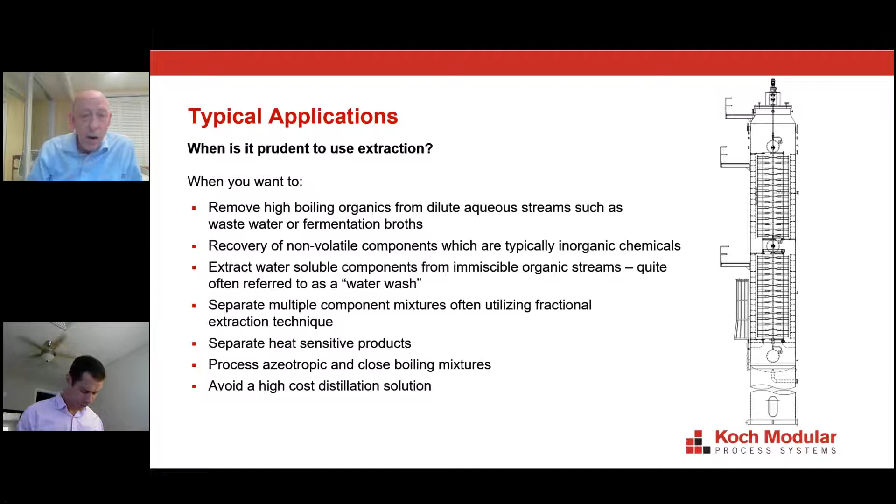The third case is when water is used as the solvent in an extraction process. Typically, if you have an organic stream with something to remove that is very miscible in water, a lot of people call this a water wash in their plants, but in actuality they are doing a liquid-liquid extraction process.

Here are some industries we get involved with. This is just a sample; we work with more than these, showing some very typical types of extraction processes you'd often see. Certainly, we do a lot of work in the CPI area.

We mentioned acetic acid, washing of acids and bases, and sometimes just recovery of very valuable materials. In metals and mining, there's a lot of different metals that can be extracted and recovered by a liquid-liquid extraction process. Many times in polymer processes, we get involved.

Caprolactam is certainly a well-known process where 3 extraction columns are typically used, and there's probably 20 or 25 plants around the world that use that technology. But sometimes we get involved with recovery of catalysts, which are very expensive and can't be disposed by liquid-liquid extraction. And then again, using water to extract material from these things.

In the last several years, we've done a lot of work in biochemical processing, for instance, where chemicals are being produced by fermentation broths or algae broths. And again, if these things are higher boilers, it's not economical to try to boil the broth away. Those could be recovered by liquid-liquid extraction more effectively.

Effluent treatment, certainly if you have a wastewater with high boilers or non-volatiles in it, liquid-liquid extraction is an excellent technology to consider for those types of applications.

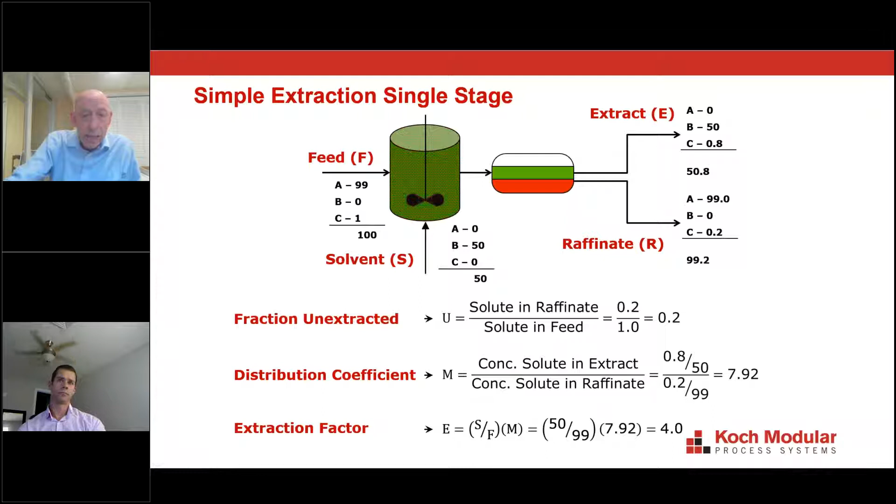So 80% extraction is obviously not good enough for most extraction processes. So if you're doing a batch process where you're mixing and decanting, which we call cross-flow extraction, after the first mix and decant, you then have to take your raffinate, add solvent to it, mix it up again, decant it again, and do that as many times as necessary to get from the feed concentration to the raffinate concentration that you're looking for.

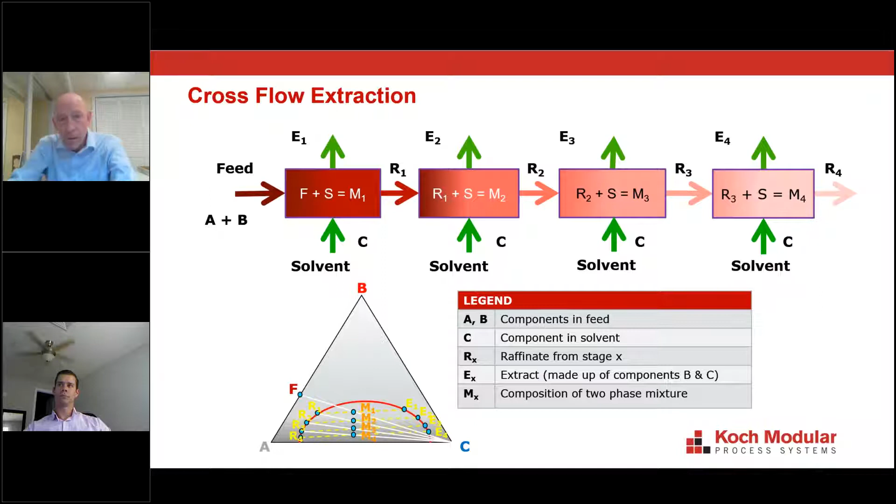Usually, though, a better process is to do this in a countercurrent fashion. This shows the same 4 stages as I had in the cross-flow example. However, the solvent now comes into the 4th stage, and then the extract from the 4th stage becomes the solvent in the 3rd stage, and so on in a true countercurrent fashion.

Now, if you run through the calculations with the same number of stages and the same solvent to feed ratio, you can get to pretty close to the same raffinate concentration using countercurrent versus the cross-flow method. But obviously now what you've done is you've significantly reduced the solvent usage.

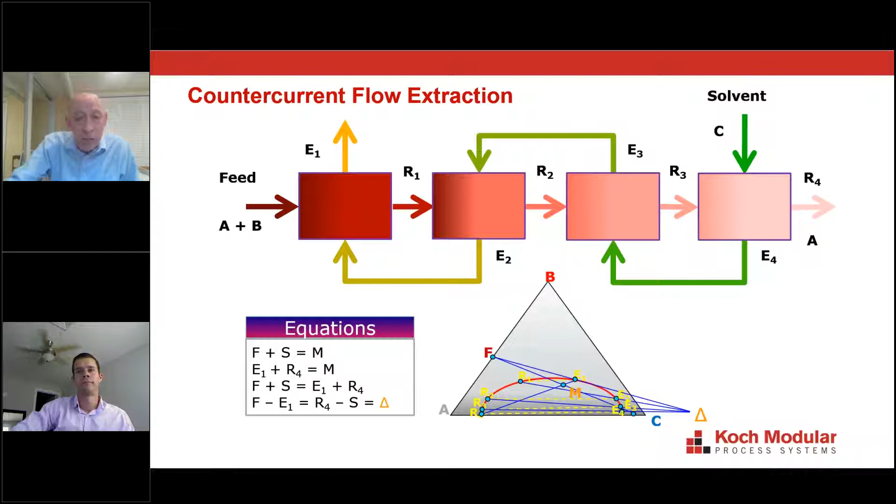In this particular example, you're only using 25% as much solvent. And usually that solvent needs to be recovered downstream, say by a distillation process, and that's where the bulk of your operating costs for an extraction process is going to come in.

It's going to come in that downstream distillation column and not in the extraction step. So certainly the idea of an extraction column then is to have your two phases flow countercurrently and then to create theoretical stages in this column to create a more effective extraction.

In this example, we're showing the feed coming in the top, and it's the heavy phase, and it fills the column, so it's what we call the continuous phase. The solvent's coming in the bottom, being broken up into droplets, which flow up through the continuous phase to the interface. So that's the dispersed phase in the process.

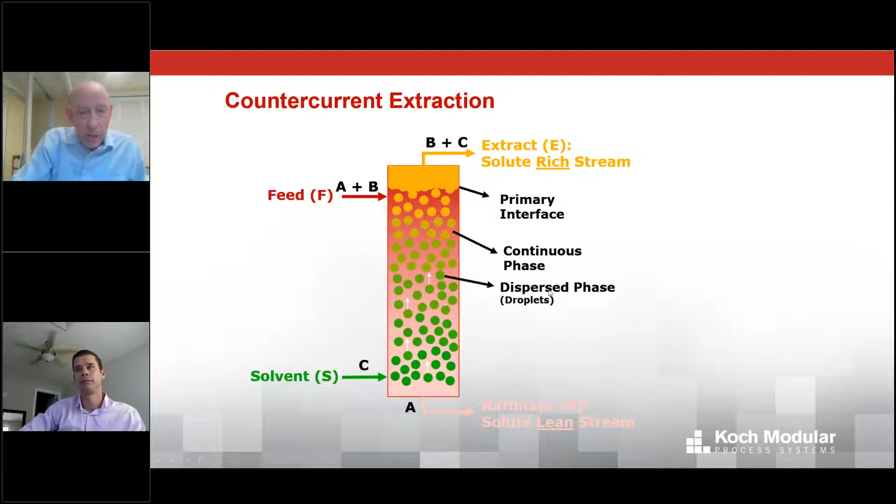And then the extract comes out the top and the raffinate comes out the bottom. So which phase should be continuous and which phase should be dispersed in an extraction column is a very good question. Brendan is going to be covering that later in this presentation.

You would then take the raffinate that you separated, put it back in, put fresh solvent in again at the solvent to feed ratio, mix it up again, separate it again. And we like to do this 4 to 6 times to get from the feed concentration to the eventual raffinate concentration that you're looking for, because the distribution coefficient can change with the concentration of the solute.

From our standpoint, it's just as important as the raw data that you have a qualitative observation of how these two phases interact. And specifically, when you turn the agitator off, how quickly do they separate? What happens at the interface? Do you get solids building up, which we call a rag layer?

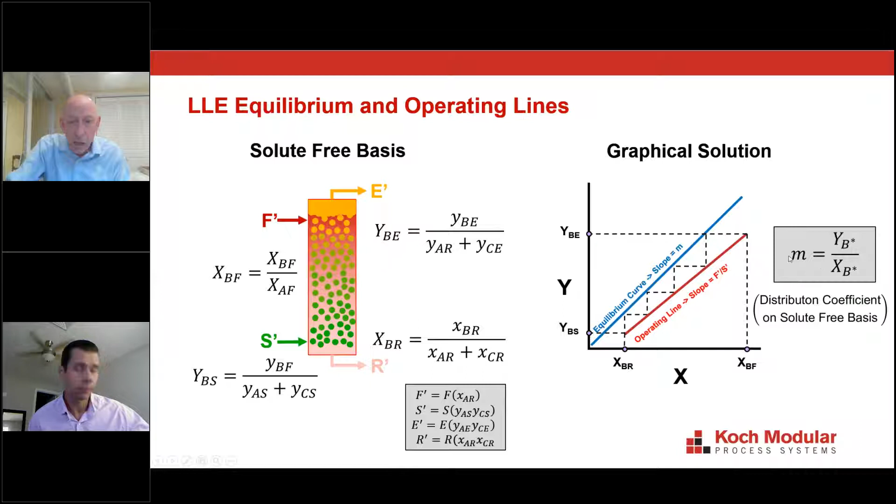So on this operating line, the upper point here is where the feed comes in and the extract goes out. The lower point down here is where the solvent comes in and the raffinate goes out. So like I said, you draw your line and step off the stages.

And this is a simple example we had where we were extracting some material from a fermentation broth. It was actually a dicarboxylic acid. The red line represents the equilibrium curve, which we generated in our laboratory.

So once we had that equilibrium curve, we wanted to decide, to get 98% solute extraction at a solvent to feed ratio, how many stages would be required.

Well, the upper point here again is the feed concentration, which you know. The raffinate concentration, the extract concentration, you know as well by material balance. The other end here, the raffinate concentration, if 2% is left, you know that. You know the solvent coming in, and you can see we step off 6 theoretical stages at those operating conditions.

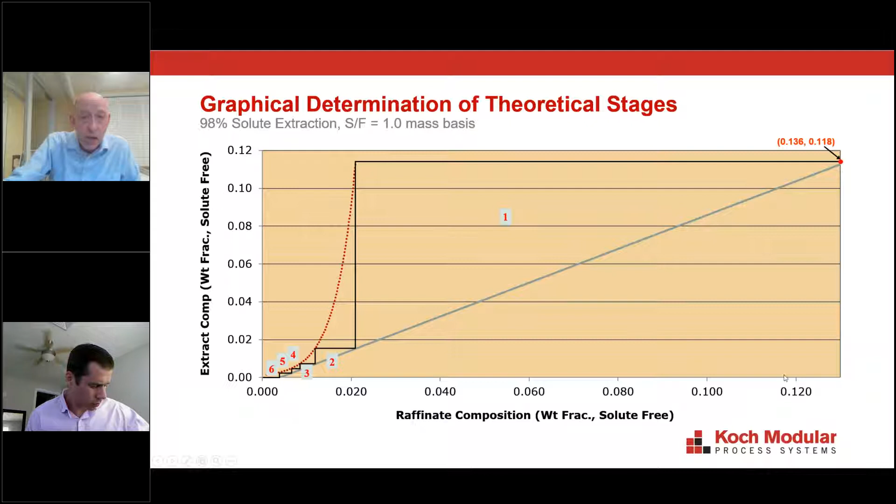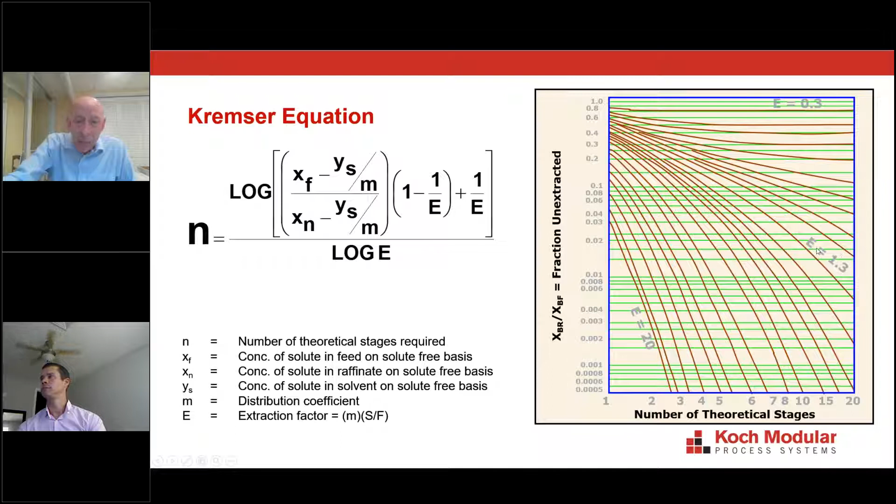I mentioned before this extraction factor of 1.3 as being a rule of thumb as a minimum. And you can kind of see why if you look at these curves, because if you go to higher extraction factors here, you can see these curves are going down into very high levels of extraction. However, as you go lower, they actually start to asymptote, and you even get to a point where you can't get high levels of extraction. So it's not an absolute, but we do find it to be a good rule of thumb.

So I just want to show you quickly 2 typical extraction processes. Acetic acid is one of them, and the solvents that are typically used are ethyl acetate or MTBE. So your aqueous feed would come in the top of the extraction column with the acetic acid. The solvent would come in the bottom. As it flows up, it will extract the acetic acid. You then would bring that solvent over to this distillation column where you would distill it and eventually recycle it back to the extractor.

At the other end of the column where the raffinate comes out, there may be a certain solubility of that solvent in the water. You're going to go to a steam stripper or just a regular stripper and strip that out and recover it, and again, recycle it back to the extractor.

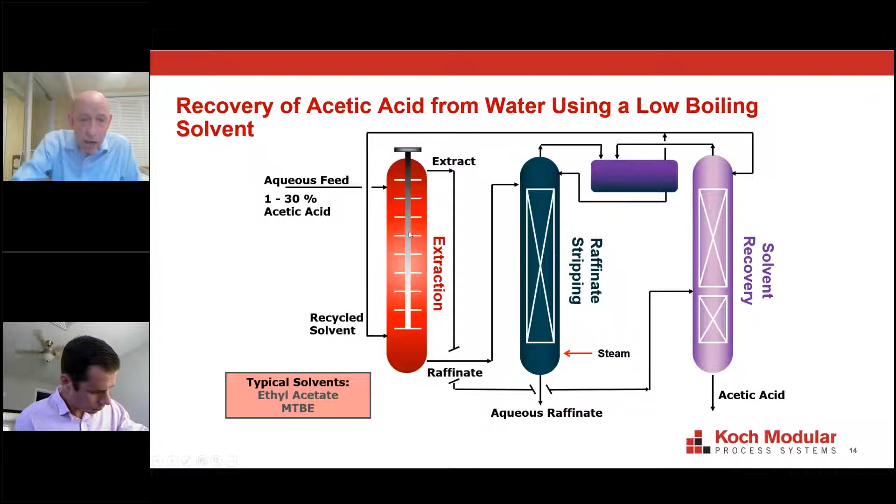And when you look at a process like this, you can definitely see why it's important to reduce the solvent to feed ratio, because, like I said before, the bulk of the operating cost is going to be in this solvent recovery column. So usually the most economical process is to put your stages into the extractor, minimize your solvent usage, and you'll have a more economical extraction process.

I just want to mention there's another type of extraction process called fractional extraction. That's where you bring the feed into the middle of a column. You bring 2 immiscible solvents at 2 ends of the column. In this case, we're showing an aqueous alcohol coming in the top, and that's immiscible in a straight chain hydrocarbon like hexane.

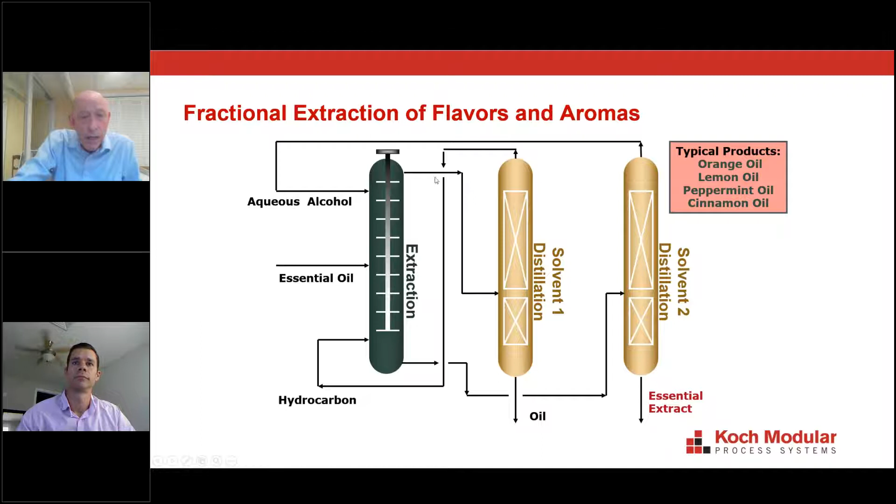But as that alcohol flows down, it will preferentially extract the more polar components from that feed. And as this solvent flows up, it will extract the more non-polar components. And then you go to 2 separate distillation columns to create, in this case, 2 separate products.

I'm going to switch gears a little bit right now, and I'm going to talk about different types of extraction equipment. There's many, many different types, and they each have a place where they can be most useful. We don't have time to go to an exhaustive description of each of these, but there are 3 basic types. You have your mixer settlers, which are either batch or continuous mixer settlers. You have centrifugal extractors, which are high-speed devices that force the phases to flow countercurrently.

And then you have your column contactors, static columns, which are usually either packed or trayed, and then agitated columns, which would have either rotating agitators or reciprocating agitators. And then there's also pulse columns. Today, I'm just going to cover 3 of these. We're going to talk a little bit about packed columns, and then we'll talk about rotating internals and then reciprocating internals for extraction columns.

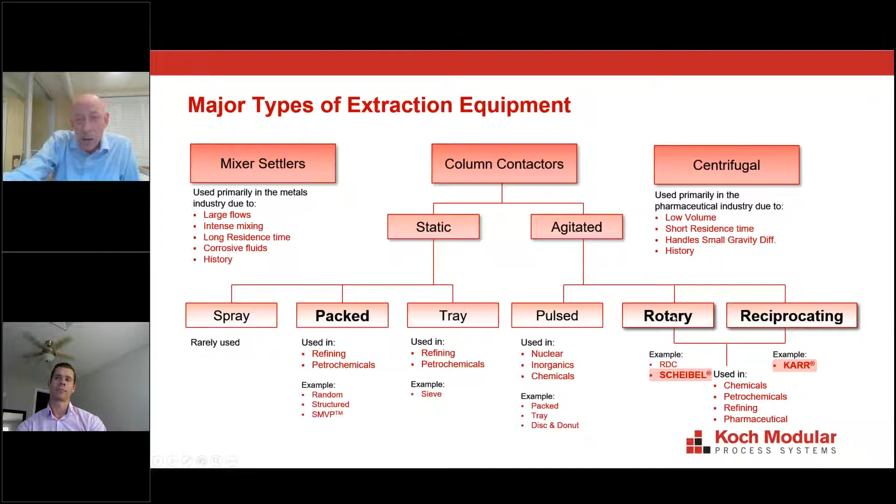So this one just shows a simple example of a packed extraction column. Typically, you're talking about using either random packing or structured packing when you talk about packing for liquid-liquid extraction. I will caution, though, in my experience and data I have seen, there really does not seem to be any good indication that there's any difference in efficiency between random packing and structured packing for liquid-liquid extraction.

You can see here there is a difference in capacity. Obviously, the structured packing has basically twice the capacity of random packing.

But the reason there's not much difference in efficiency is because in liquid-liquid extraction, as opposed to distillation, you're not trying to form a film on the packing. What you're trying to do is create droplets. Droplets create the most surface area for mass transfer in liquid-liquid extraction processes.

In fact, if the disperse phase starts to coalesce on the internals, you're going to lose surface area, you're going to lose efficiency. So it really is very important to pick the right material construction for your internals.

In an aqueous organic system, water will preferentially wet metal. So if you have water as the continuous phase, you're going to want metal internals. Organics will typically preferentially wet plastics. So if the organic is going to be the continuous phase, then you probably want plastic internals.

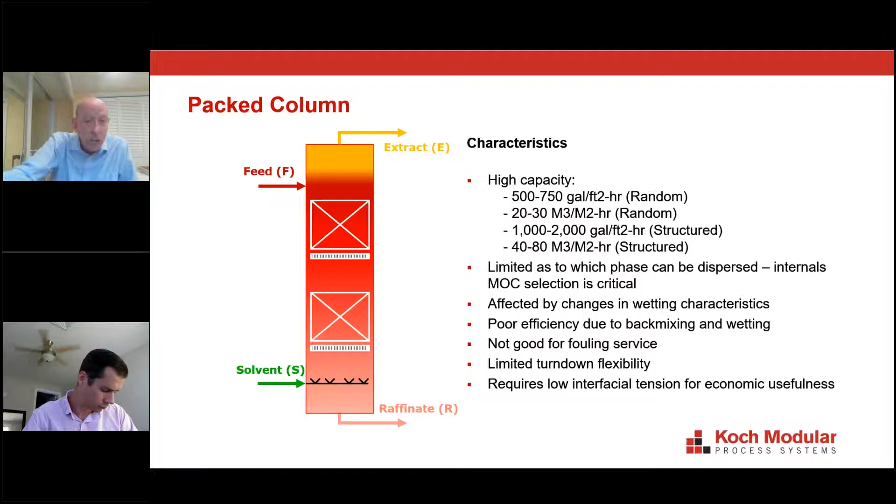Obviously, for what I just talked about, it could change the wetting characteristics. They don't turn down too well. Maybe you're lucky to get down to 50% of capacity, but if you try to get too low, you're actually going to lose efficiency. And they typically are best for systems with low interfacial tension, not high interfacial tension. For instance, toluene water is a high interfacial tension system.

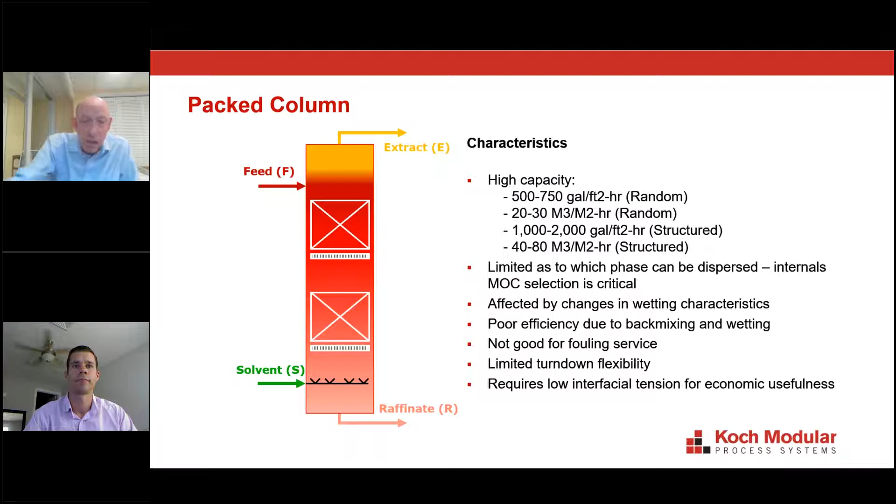Now I'm going to turn to the two types of agitated columns. The first one I want to talk about is a SCHEIBEL column.

In a SCHEIBEL column, you have a series of rotating turbines on a central shaft, and those turbine impellers are sandwiched between inner baffles and outer baffles. So what you're seeing here is one agitated stage in a SCHEIBEL column.

The way this works is the liquids are drawn into the impeller, into the middle, and they're sent out through the inner baffles, and then you get a very interesting mixing pattern between the inner and outer baffles and the turbine impellers. This is what gives this a very high efficiency.

And plus all this baffling helps significantly minimize back mixing. So this column has the highest efficiency of any extraction column based on data that's been published in the literature. So it really is best suited when you need a lot of theoretical stages.

Another very important feature is it has a very high turn down to about 25% of design without affecting the efficiency. We don't highly recommend it for fouling systems or systems that tend to emulsify, although it will handle these to some degree, but you'll see in a minute, I'll talk about a KARR column.

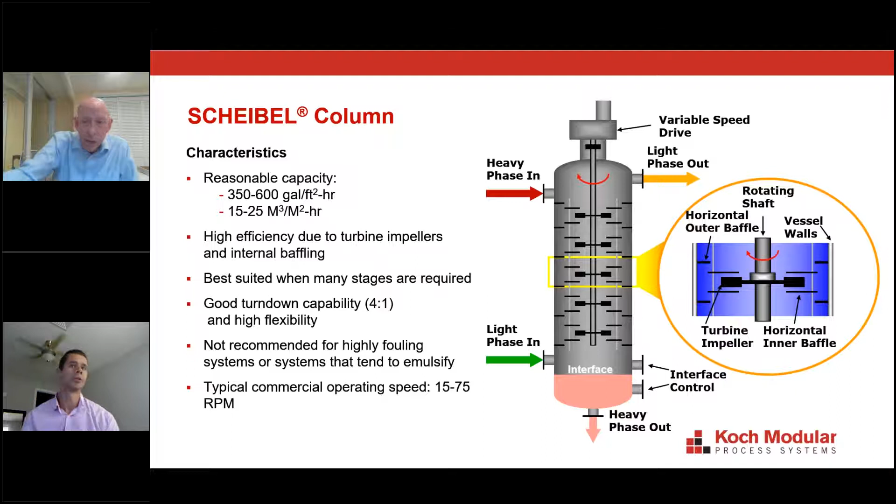And I also point out here that the agitation speed of a commercial SCHEIBEL column is not very high, and these are not high-speed devices. Typically, the lower speed is for the bigger columns, and the higher speed is for a smaller diameter column.

Okay, these are the internals of two different SCHEIBEL columns, just to give you a feel. The one on the left was a large SCHEIBEL column. In this particular case, all you're seeing is the inner baffles here and the turbine impellers sandwiched between them.

The outer baffles would actually be welded to the inside wall of the vessel when you slip this internal cartridge in. The one on the right is a full cartridge. This has both the outer baffles and the inner baffles all together. And on smaller diameter columns, that's what we use.

And then you can see this Teflon edge, so that as you drop this into the column, that's what will seal those outer baffles.

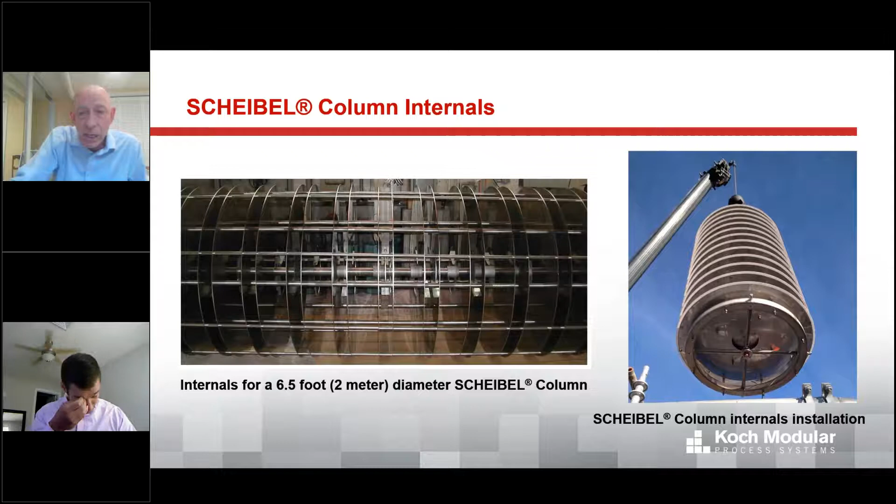Next, I want to talk about the KARR column. This is unique and different than any of the rotating type columns. What you have here is a plate stack that's reciprocating up and down.

It has very good efficiency and good turndown like the SCHEIBEL, but the key to the KARR column is the uniform shear mixing. With rotating internals, you have a non-uniform shear across the whole cross section, but with this column, you have a uniform shear.

Therefore, you create a more uniform dispersed phase particle size, and for that reason, we have found this is the optimal column to use for systems that have slow phase separation, like low density difference, or they tend to emulsify very easily. If you have a fermentation broth or an algae broth, you're almost certainly going to want to put it in this type of a column.

Because of the large open area and the fact that there's no dead zones, every part of the internals is moving, it will also handle suspended solids very well. We have in fact put up to a 40% slurry through a KARR column, and it's worked effectively.

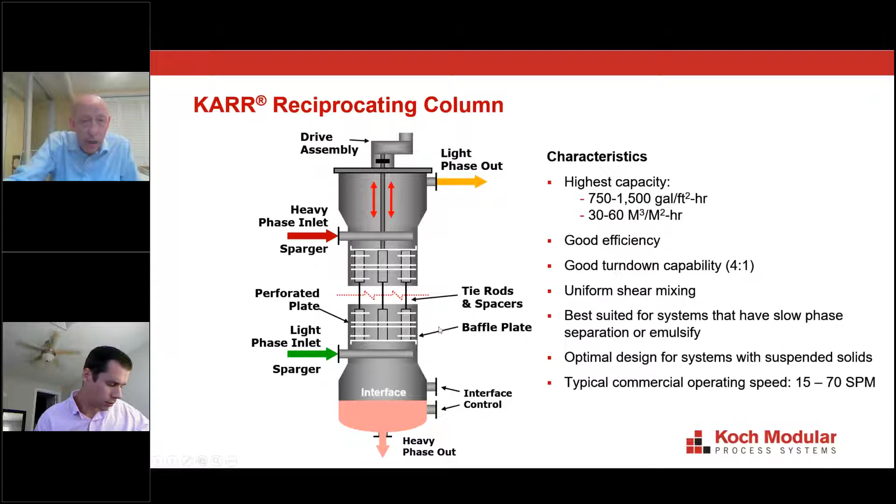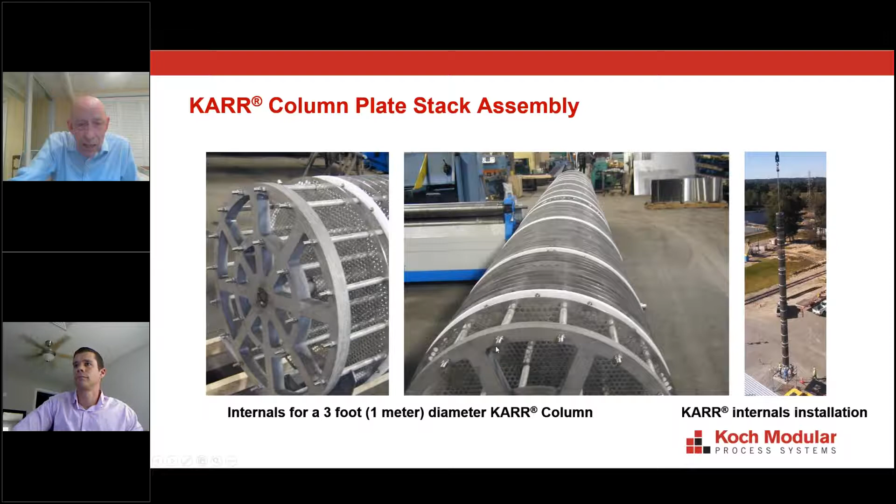Then you have these white baffle plates. Those are donut-shaped plates with a Teflon edge. That's the highest diameter in the column, so if there's any wall contact, it will be that. And then you have a spider plate here, one at each end of the column and one in the middle, so that when you tie this whole thing together with these tie rods, that's what keeps this to be a rigid structure.

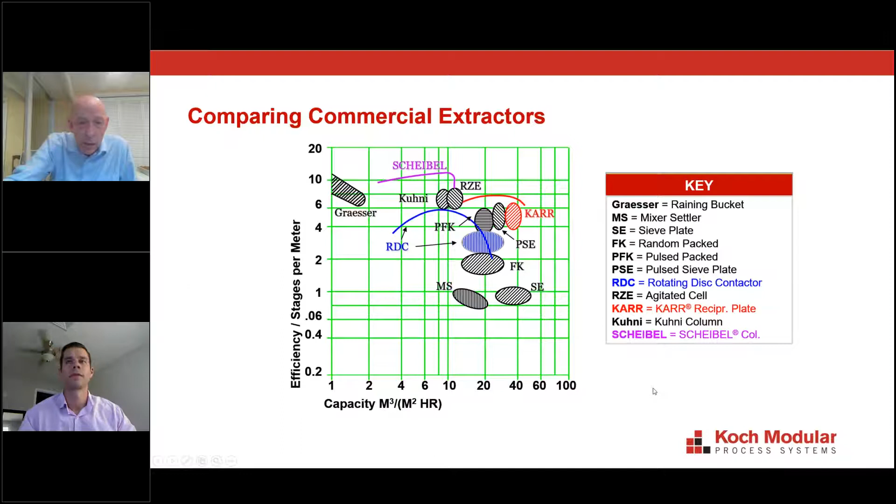Before I turn this over to Brendan, I just want to point out when we're in an early stage of an extraction process to give you an idea of what the column is going to look like and what it's going to cost, we can do that. The things we're going to be required are these.

First of all, we need your liquid-liquid equilibrium data. We need your mixing and settling behavior when you generated that liquid-liquid equilibrium data. Then we need to know what your feed is going to be and what your required raffinate is going to be. And of course, the design capacity for your system.

With all of these things, we can, number one, select what we feel will be the optimal extraction column for your process. We can then do a preliminary design of that column, diameter and height, get a budget cost for that extraction column, which then gives you an idea of what this is going to cost you, and you can make a determination if you want to keep moving ahead with the process.

The next step in any development is going to be pilot testing, and Brendan's going to talk about that. Pilot plant testing is critical if you want a process performance guarantee. So I'm now going to turn this over to Brendan, and he's going to take you through a lot of that pilot plant testing that I just mentioned.

This is Brendan Cross, and like Don said, I'm going to be focusing primarily on pilot plant testing and different types of chemical phenomena that can happen and take place within an extraction column.

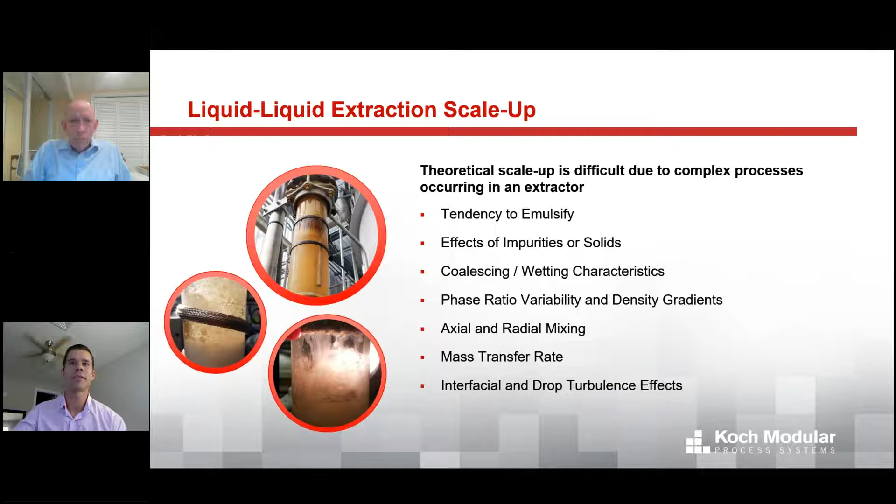So the best approach really is to perform a pilot test, testing out that extraction process. And if it's successful, scale up from the pilot plant data with some known correlations and equations for the particular type of extraction technology that was tested.

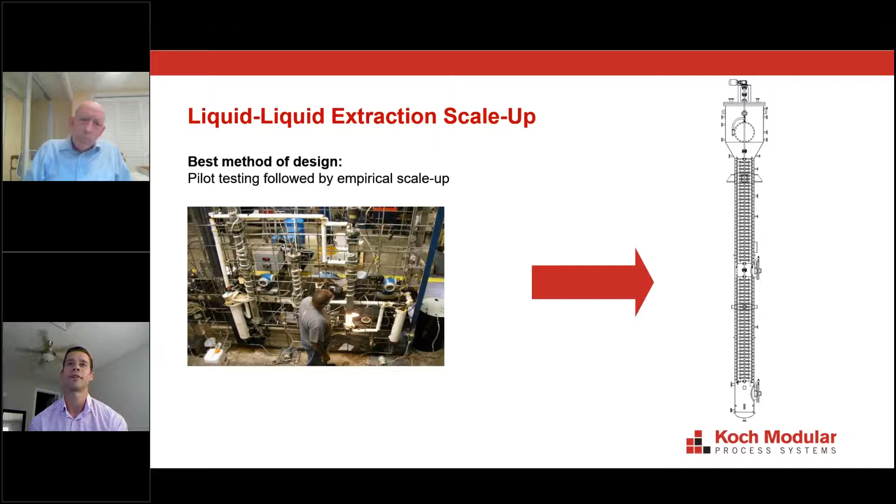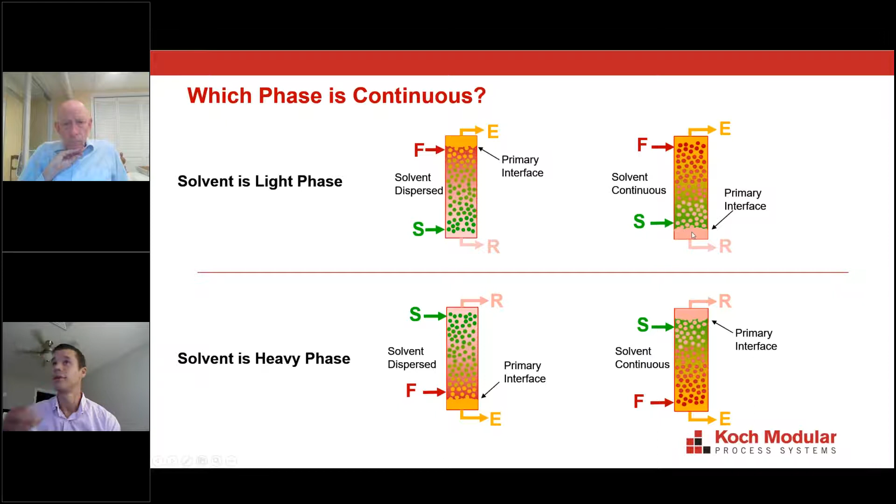You can see in the upper right diagram, the solvent has a lighter density than the feed, and the feed is dispersed, so the feed is flowing down, forming the interface at the bottom of the column, and the solvent is the continuous phase flowing up through the column.

This is something else Don touched on earlier: how do you determine which phase is dispersed and which phase is continuous? There are 4 factors we like to look at when designing an extraction test or coming up with a preliminary design for an extraction column on how to select which is dispersed and which is continuous.

The first of these is the most intuitive, I think, and that's just looking at the relative volumetric flow rates of the feed and the solvent. For static columns, like the packed column Don discussed earlier, you typically want to disperse the higher flowing phase. The reason is that you're counting on that relatively higher velocity and momentum associated with the higher flowing phase to be broken up on those fixed internals.

For agitated columns, we like to do the opposite, because this proves to lead to more efficient operation of the extraction column and also allows them to run at greater capacity. There, you're counting on those rotating or reciprocating internals to break up the dispersed phase, so you can easily disperse the lower flowing phase and get really good efficiency that way.

Something else we like to look at is the relative viscosity of each phase. From a practical standpoint, what you want to do is disperse the more viscous phase. You can imagine if you had a polymeric type solution in an extraction column and made it the continuous phase, it would put a lot of drag on those less viscous dispersed droplets and really limit the extraction column's operation from a capacity standpoint. So the best thing to do here is just to disperse the viscous phase.

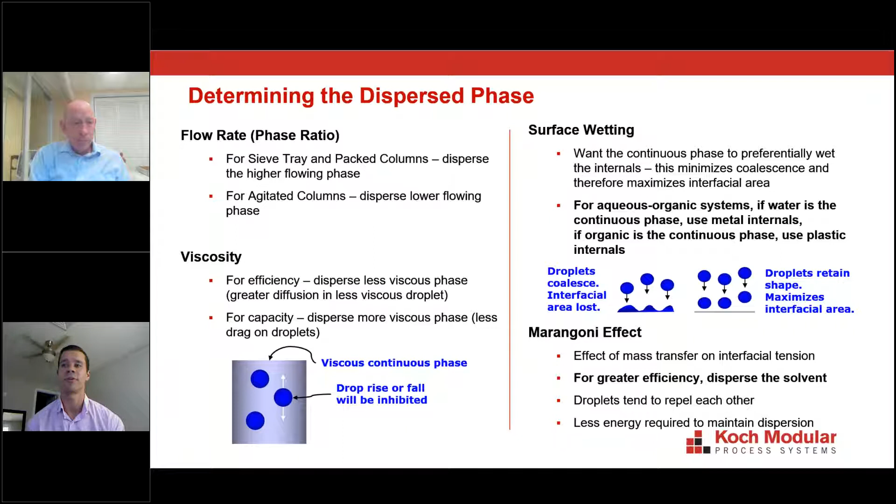So there are a couple of different ways you can combat these phenomena from occurring in an extraction column, because they can become problematic if they're allowed to build up over time. One thing you can do is simply reverse the phases. I've seen that really helps from an emulsion band standpoint.

Also with emulsion bands, you can slow down the feed rates into the column or reduce the agitation speed. Oftentimes that'll reduce the growth of an emulsion band and allow it to be maintained at an acceptable thickness. For rag layers, whenever we design a commercial scale extraction column, we'll actually put nozzles around where we expect the interface to be, so that if a rag layer does form, that material can be pumped out right at the interface, and those solids can be filtered out using an external filter.

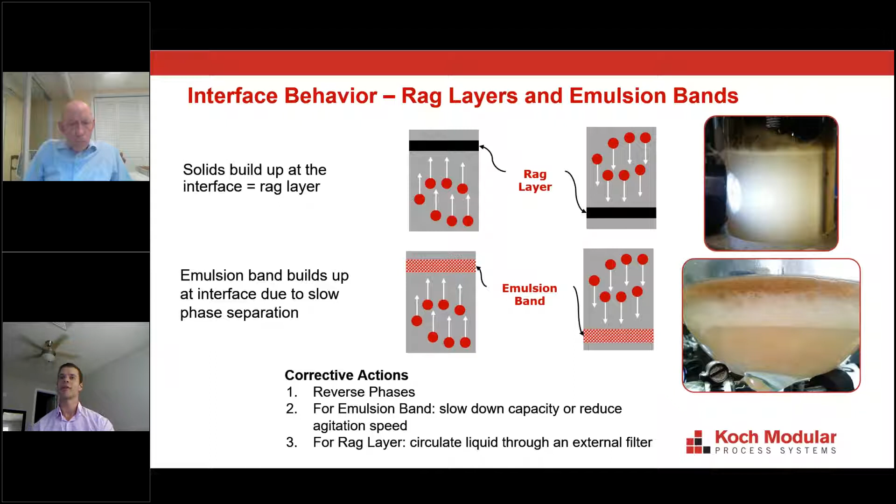So there's a few different ways to combat this. You can put an expanded head at one end of the column where you're seeing entrainment. This just slows down the velocity of the continuous phase, allowing those dispersed droplets to fall out.

The second thing you can do, and we often do this when running pilot tests, is put a coalescing element directly in the column where you're seeing entrainment. The discrete droplets go onto that coalescing element, coalesce and come together, and then go out the right end of the column.

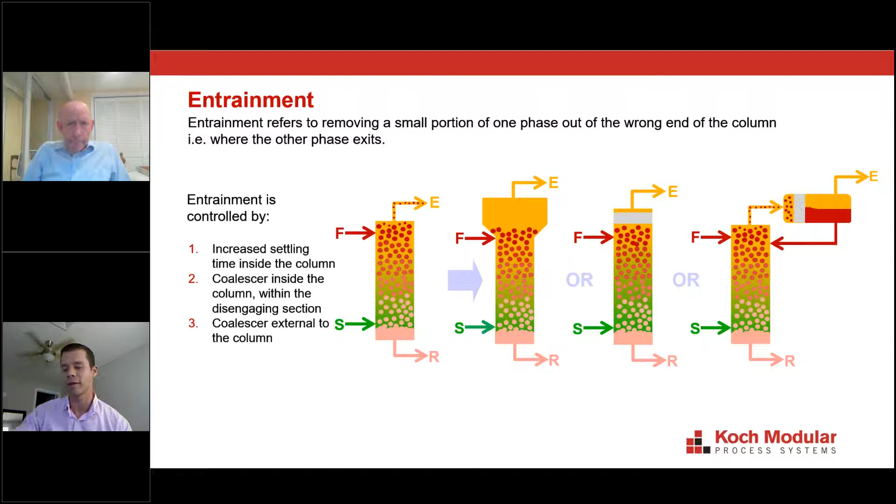Something else you can do, and we see this quite often commercially, is use an external coalescing vessel, shown in the last picture on the right. That's an external vessel with its own coalescing element, which does the same thing as putting a coalescing element directly in the column. The advantage here is that if you need to temporarily bypass that coalescing vessel, that can be done commercially, so you could clean out the vessel and its coalescing element while still running the extraction column. This minimizes your downtime.

Flooding is another phenomenon we see in extraction columns, and it's another reason it's really critical to perform a pilot test before scaling up to a commercial design. Essentially, flooding means the dispersed phase is being held up within the column, forming a second interface. That's an inoperable condition, because if it gets severe enough, not only are you limited from a mass transfer perspective, but eventually both phases will go out both ends of the column.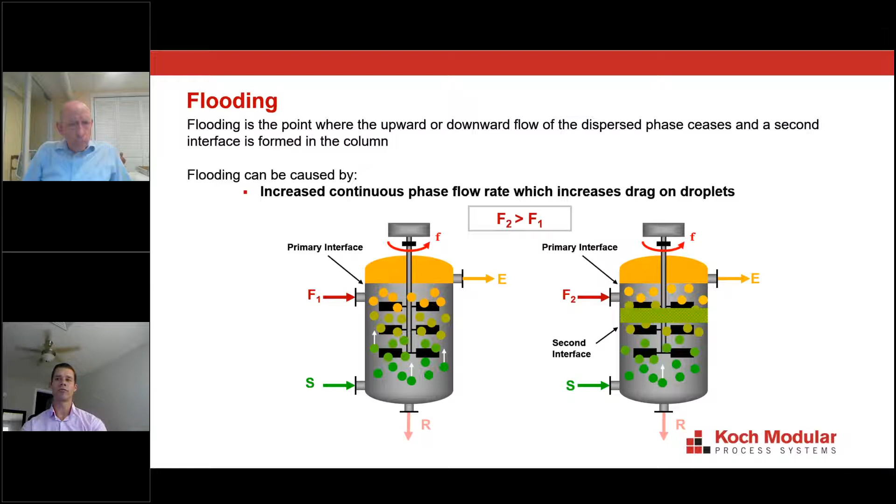There's a couple different ways this can happen. One way is if you increase the continuous phase flow rate so much that it prevents those droplets from leaving the column, shown in this first diagram. The second, more intuitive way, is if you put too much energy and rotational speed into the column, you create finer droplets, and eventually they get so small that so much drag is put on them by the continuous phase that they won't be able to leave, and you'll flood the column.

When we run a pilot test for an extraction process, this is something we always look to find: what is the flood point of the extraction column? Interestingly, very close to the flood point is often where the extraction column runs at its most efficient point. We also like to know how easy it is for the system to flood, and if the system does flood, how we can get out of that condition.

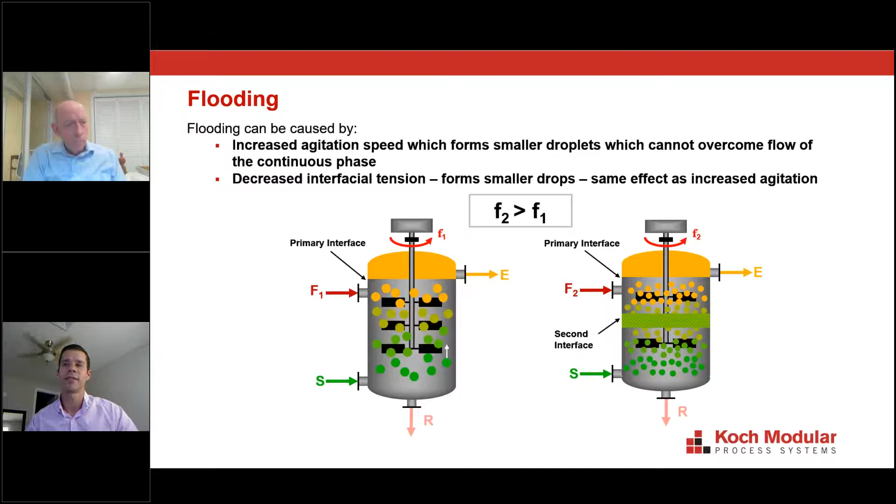Is it just by slowing down the rotational speed in the extraction column? Is it by reducing the feed rates to the column, or to the point where you have to stop the agitation entirely and stop the feed rates entirely? So this is a point that when we perform a pilot test, we always like to know where that flood point is.

Typically, to scale up a commercial scale extraction column, you look at data from the pilot test: what diameter you ran at, what the commercial scale feed rates are, the height of the agitated section in the pilot test, and either the rotational or reciprocating speed of the extraction technology used. Then, using established correlations and equations for that technology, you can scale up to a commercial scale design.

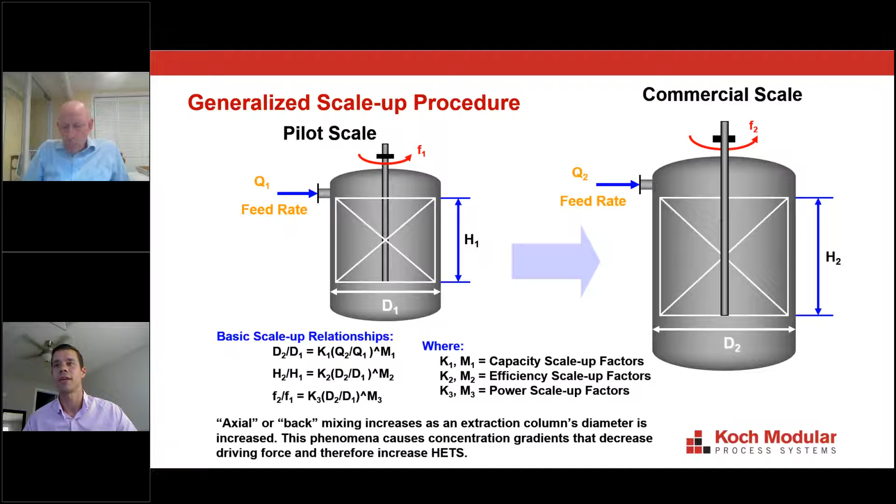Before I go into an example of how we did this with an extraction pilot test, I'm just going to give everyone a quick overview of our pilot plant capabilities.

We have the capability to test Karr columns at our pilot plant in Houston with a plate stack as high as 20 feet. We can also test Scheibel columns that contain up to 150 agitated stages. We also sometimes test packed extraction columns and rotating disc extraction columns as well. Quite often, we'll also test the downstream solvent recovery and distillation steps for downstream purification following an extraction test. We have typical analytical capabilities such as GC, HPLC, and IC, among others. And if we can't do it in-house, there are other labs we have really good relationships with in the Houston area that can perform the analysis you're looking for, most likely.

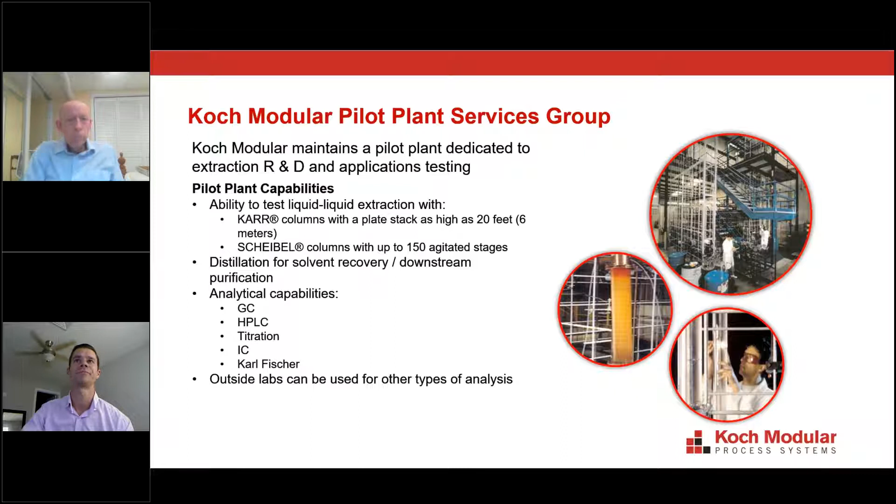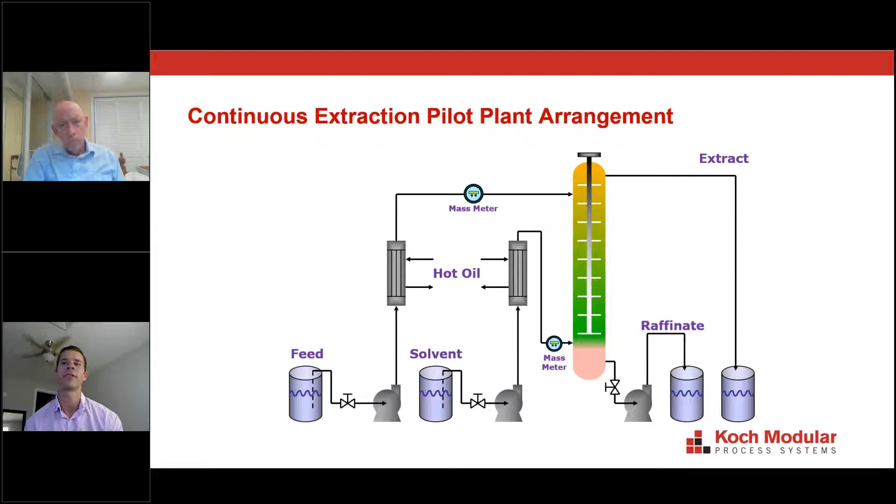This slide shows a very typical extraction pilot test flow diagram. You can see we have mass meters on the feed and solvent lines going to the extraction column. We have heat exchangers on those lines so we can control the operating temperature of the extraction column. In this instance, the feed is dispersed with the interface at the bottom, the raffinate is leaving the bottom of the column, and the extract is coming out the top of the column.

So Don, myself, and Tom Lightfoot, who's our pilot plant manager in Houston, wrote an article for CEP magazine back in February of 2018 that does a good job explaining how to design a liquid-liquid extraction pilot test, with a couple of examples showing how we optimize different processes. If you're an AIChE member with access to CEP articles, this is a really good one to review if you're interested, because it gives a good overview on how to run and design an extraction test.

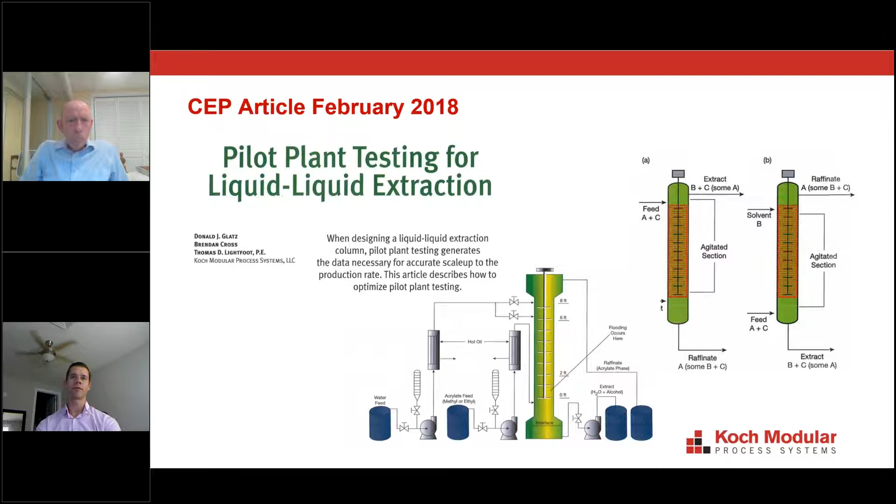That being said, I'm now going to discuss a particular extraction process that we tested.

This was a process where our customer was looking to recover greater than 95% of carboxylic acids from a fermentation broth feed stream that had about 5% acids in it. Ethyl acetate was selected as the solvent for this process, but our customer found that it emulsified very easily, particularly during lab tests and when they tried running their own pilot test using an RDC column. They found that operation of the column was really difficult due to the system's tendency to emulsify. They weren't able to get the recovery they were looking for, and they also had to use a higher solvent to feed ratio than anticipated. They had to use a value of 2, and they wanted to use less than that.

Since the system had that tendency to emulsify, we knew right off the bat that a Karr column was going to be a good fit for this process due to its uniform shear mixing, which Don discussed earlier.

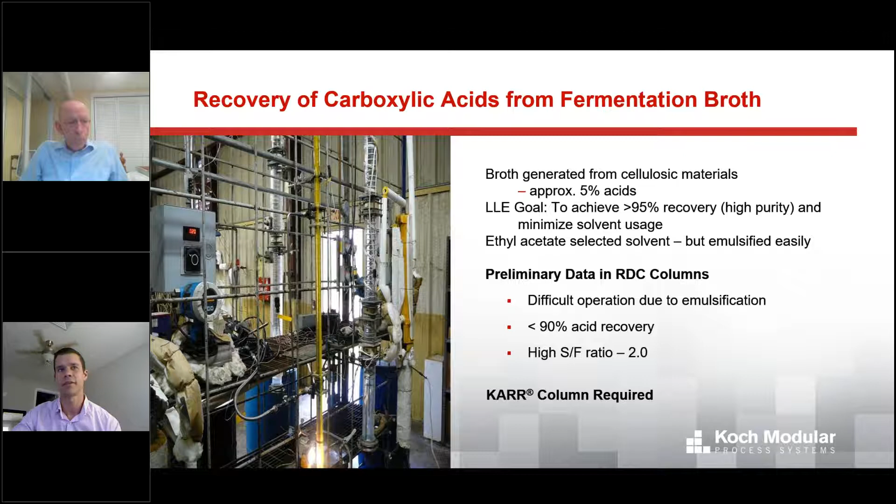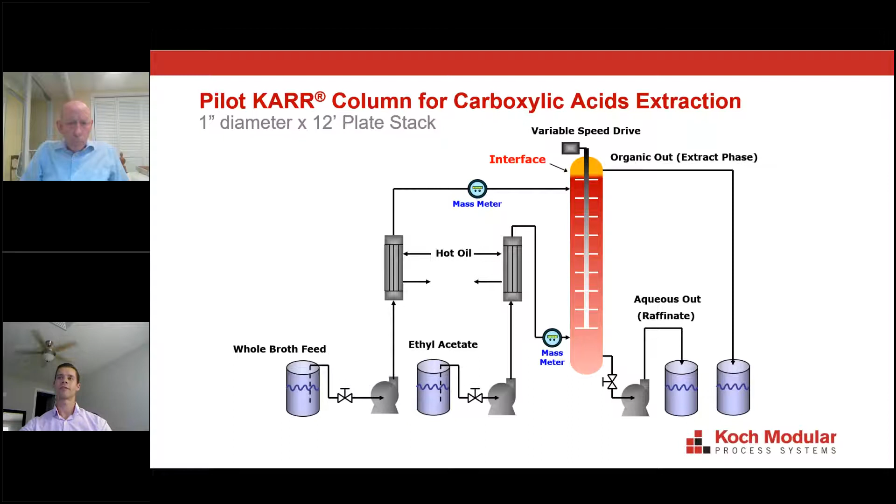Now I'm going to go through a series of runs that show how we optimized this extraction process and made the pilot test a success.

For the first 3 runs, we ran the extraction test with a fixed plate stack height, essentially just the agitated section that's performing the mass transfer within the extraction column. This was also run at a fixed capacity and ambient temperature with a fixed solvent to feed ratio. In run 1 we got pretty decent levels of extraction, and in run 2 as well, but we did flood the column at 50 strokes per minute.

Then we tried reducing the plate stack height in an effort to slightly reduce the capital requirements for the commercial scale extraction column. But we didn't make spec, and we actually flooded the column at 40 strokes per minute. We tried going to 10 feet and made spec here, but after this run we decided to go back up to 12 feet because we wanted to reduce the solvent to feed ratio further. In runs 7 and 8, we made spec at 2 different capacities at ambient conditions with a reduced solvent to feed ratio.

We then made what proved to be the key parameter change for this extraction test: running at elevated temperature. When we ran at an operating temperature of about 45 degrees Celsius, we blew away the spec in runs 10 and 11.

Based on the successful pilot test, we scaled up to a commercial scale design based upon run 7 and 11. We chose run 7 in addition to run 11 because it gave our customer the most flexibility, so they could run this extraction process both at elevated temperature for higher levels of extraction, but also at ambient temperature for sufficient levels of extraction.

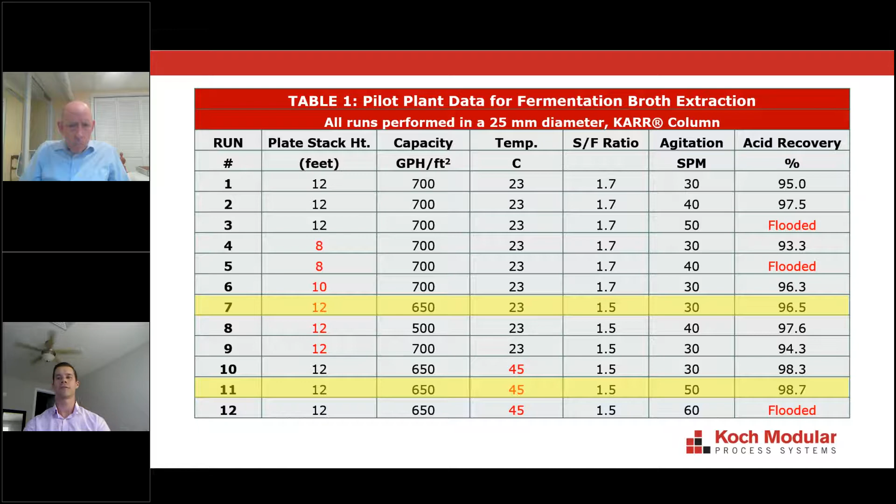When it comes to scaling up a pilot KARR column, and this was run in a 1-inch diameter pilot KARR column, you can scale up to a commercial scale column 1-to-1 based upon the capacity. Since that pilot test was performed at 650 gallons per hour per foot squared, and we knew the commercial scale feed rate, and we optimized the solvent feed ratio, we were able to design the commercial column with a diameter of 22 inches, so it would run at that same capacity of 650 gallons per hour per foot squared. Then we have a couple different equations that we use to scale up both the plate stack height and the commercial operating speed for the commercial column.

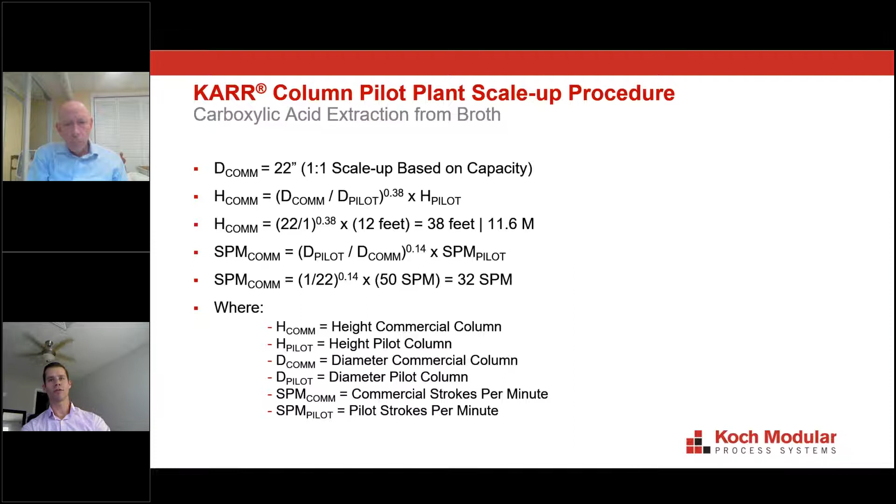The plate stack height worked out to be about 38 feet, and the anticipated commercial operating speed would be 32 strokes per minute, but that's something that can be fine-tuned when you're actually running the process in the field.

And this is what the commercial scale KARR column looked like for this process. You can see it has a diameter of 22 inches, as I mentioned before. The plate stack height was 38 feet. We put expanded ends on this column, as we typically do with KARR columns, just to minimize entrainment. The overall height of this column is about 15.4 meters.

You can see in the picture on the left, this extraction column being installed at the site in one of our process modules. Not only was the extraction column and its associated instrumentation, controls, and piping provided within a process module, we also designed a complete modular system that included solvent recovery.

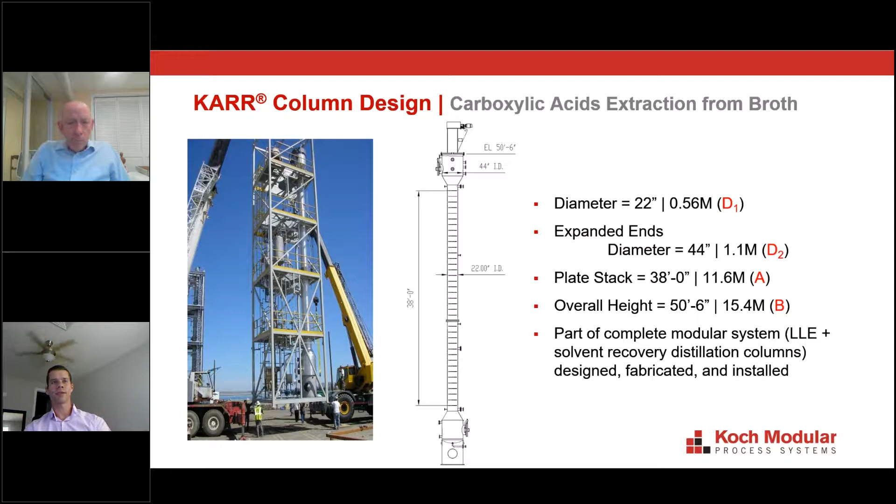On this slide, you can see that. In the picture on the left, the module contains the extraction columns. And the module on the right has a solvent recovery column here, and then this is a small raffinate stripping column here. So we were able to develop and design a complete extraction system with solvent recovery based upon that successful pilot test.

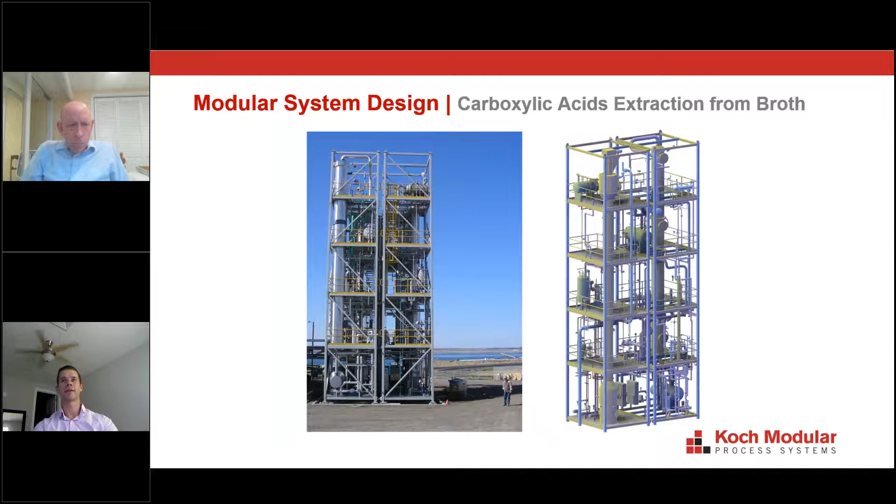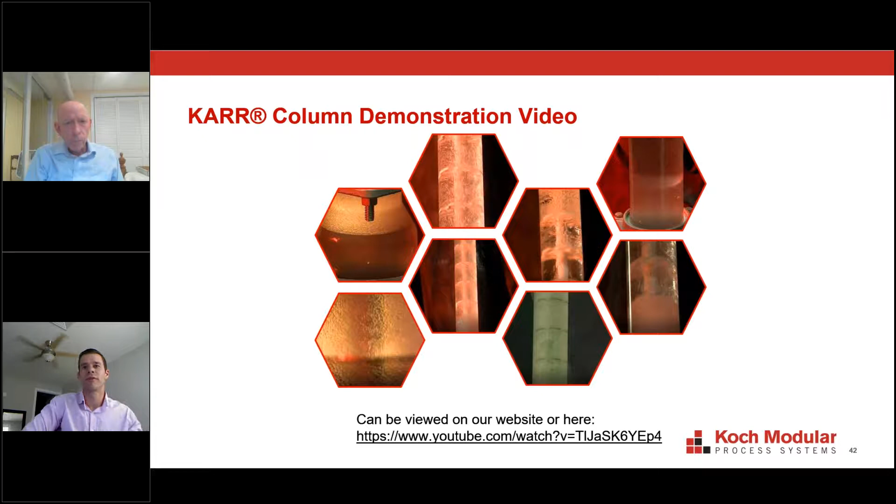We also have a video up on YouTube that shows the performance of a KARR column. This is a really good video to look at and watch if you're interested, because it discusses and goes through a lot of the different phenomena that I discussed earlier, like flooding, different wetting characteristics, emulsion bands, etc. If you're interested in watching this video, you can contact us, contact me through LinkedIn, and I'll send you a link to it. Or if you just do a simple Google search for KARR column YouTube, it should come right up, and it's definitely worth a watch.

So with that being said, that kind of wraps up our webinar, at least from what Don and I are going to present today.

As a company, Koch Modular has supplied over 300 commercial scale extraction columns. We've also supplied hundreds of pilot scale extraction columns, and within our pilot plant itself, we've tested more than 200 different processes. So I think at this point, I'm going to open this webinar up to any questions that may have come through.